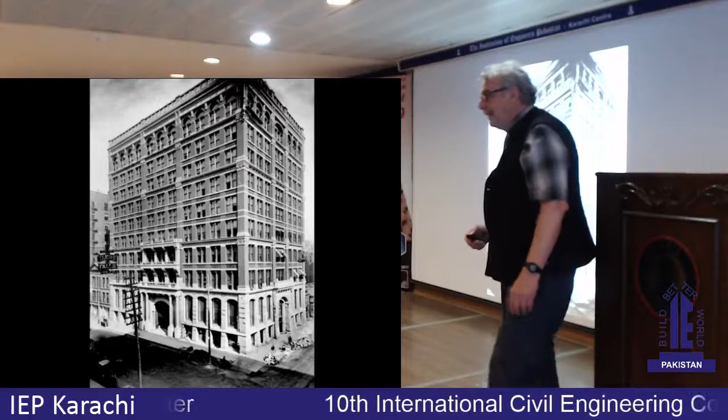But I'm switching the story now to the late 19th century in Chicago. What is considered the first skyscraper is this building here, only 10 stories high, but as what was then a mixture of iron and steel frame, but a completely coherent, effectively moment frame structure, but with the masonry around and infilling the walls. It was the first phase of tall buildings, and here this picture was taken only 3 days ago here in Karachi. These are 10-story buildings.

So, and we don't think anything of it. And as we drove by, I said, "Are you really serious about these buildings? They look like they all are vulnerable to soft story collapse." And everybody I've talked to, one of the colleagues here, says, yeah, they are. So I guess there's a bit of a problem.

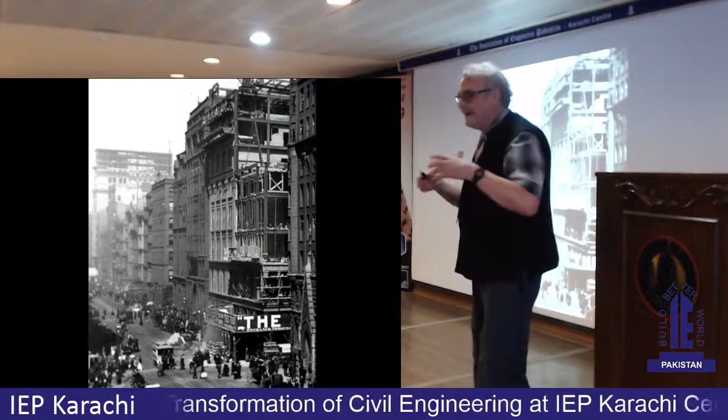But back to Chicago, this was a new world because buildings till then had masonry, solid wall structural systems. And it was a totally different experience to be an engineer in the days of Christopher Wren or even Michelangelo or Brunelleschi, who were working with masonry. It is a lost art to a large extent for all of us architects, and the engineering that comes with my architecture degree, but I'm not a structural engineer. But now I am very much embedded in the effort to do engineering of buildings, and that's what I'll be speaking to.

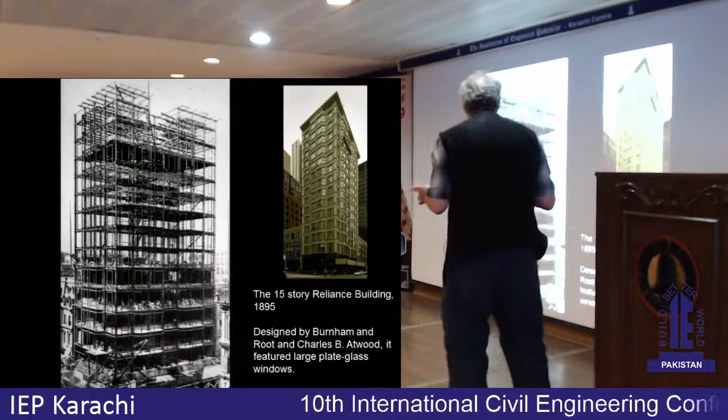But the switch to frames, hopefully it'll communicate. And as you see, what was remarkable is the complete steel frame. This is now the transition from iron to steel. One of the best iron frame buildings I found was in India, in Mumbai, what was then Bombay. But here, steel frame. And the Bessemer converter process brought steel into massive production, and it became the basis for doing structure. And you see the windows are ever so much larger than when it was a bearing wall building.

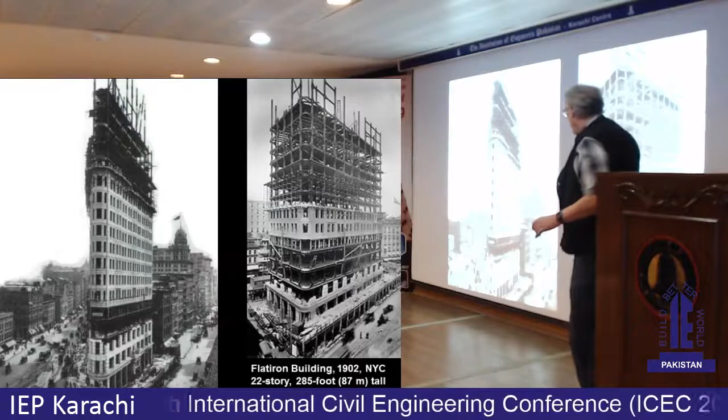And one very good example of this and the engineering of it is to look at the Flatiron Building in New York, because these pictures of it show that the putting of this heavy wall masonry on it is by starting the building of it upper as well as at the lower, to avoid it bearing on itself to become a bearing wall, because it's hanging off of the frame. So the wall is the same thickness from the basement to the roof. And that's a transition in the building construction. But remember, now we're talking about a huge amount of masonry, multiple leaves of masonry in a frame building. And so how do we do this?

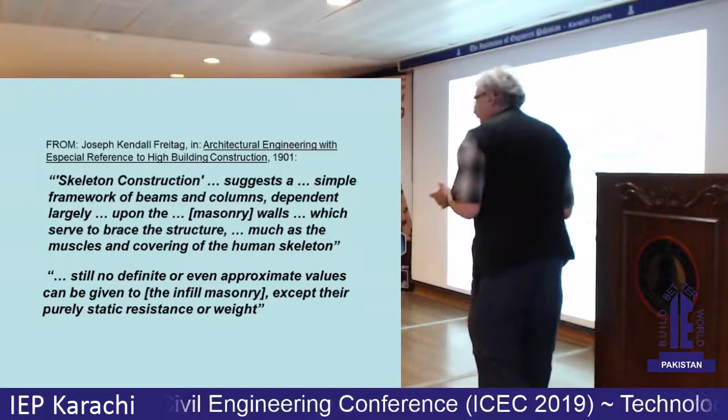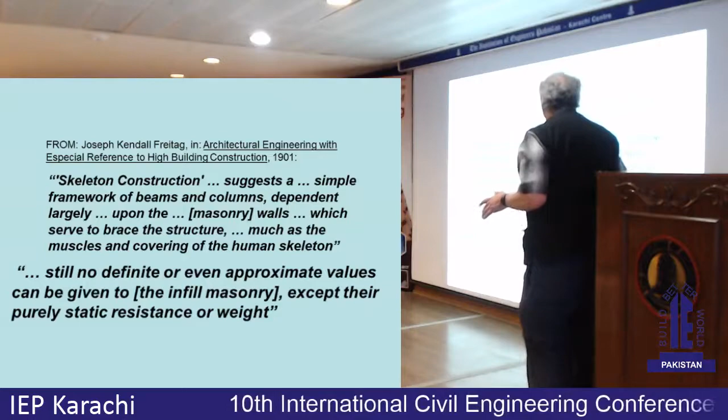And there is a textbook authored by a gentleman by the name of Joseph Kendall Freitag, structural engineer, who did a textbook on how to do tall buildings in that era. This was published in 1901 and again in 1905, a second edition. And he says, still no definite or even approximate values can be given to the infill masonry except their purely static resistance or weight. But notice that he's saying it's essential to the design. More or less like the rest of our body from the bones holding the body, the anthropomorphic analogy for the making of buildings in that period that are structural frames.

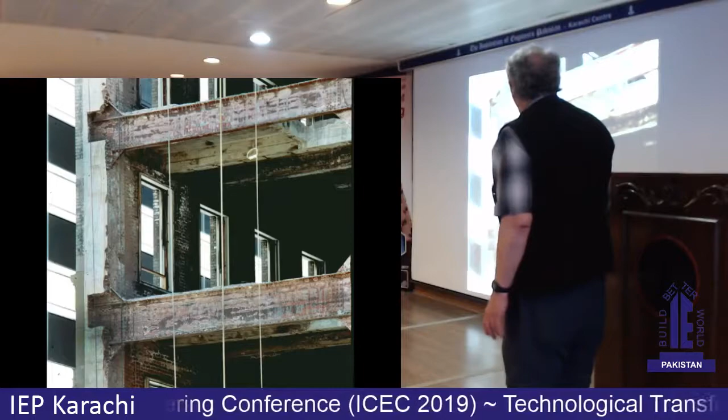And here's a good example constructed in San Francisco after the city burned down in 1906, which I'll get to in a moment, with this system. And you see how much masonry there is here. And that the steel frame is not a braced steel frame, but it has little, if anything, little haunches here. But imagine the weight of the building. So we're talking about a different kind of building than we're used to today, where the whole effort is to have as little masonry as possible and to have the frame designed and computed and mathematized with portal frame analysis. But you see how lightweight the frame is.

The last of this series of buildings is the Empire State Building, 100 stories. And it's heavy wall masonry. They even did some testing with some measurement instruments, and in a very heavy hurricane windstorm, they computed that not until they saw a crack in the masonry did they even come a load onto the steel frame.

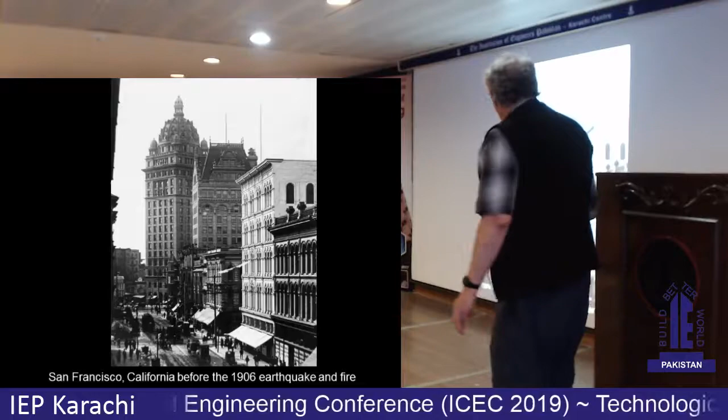So looking at San Francisco before the earthquake in 1906, it was already full of these buildings. It was the biggest city west of the Mississippi in North America, and economically the center of the whole left coast of the continent. And then the earthquake came.

The earthquake, of course, then initiated a fire which burned through the entire downtown of the city, burning out every single building, including all of the fireproof buildings that were steel framed with masonry infilling. All of the contents, just like with the World Trade Center after the attacks, burnt. But unlike the World Trade Center, the buildings remained standing. And you see the fire went everywhere.

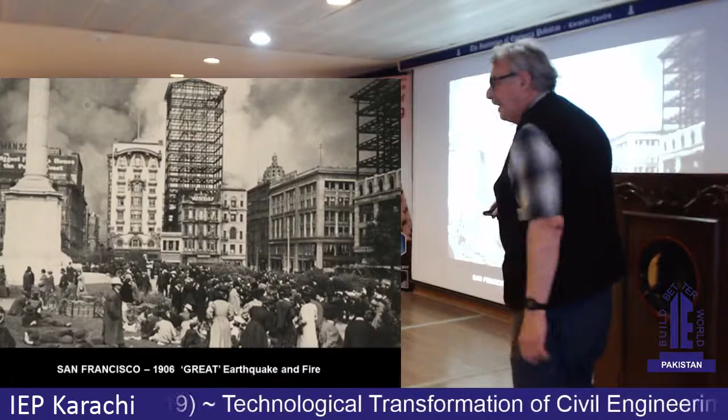The firefighting in those days was primitive at best, and the earthquake had already broken all of the water lines. So it was impossible. It was only when the winds changed to blow in from the west that the fire stopped. That's why we have Victorian wooden houses still in San Francisco today. But you see, this is after the earthquake, before the fire, and look at how the fire took the rest of the city. It is what took the city down.

But still standing here under construction are steel frame buildings, but there are many that were already finished and occupied. And believe it or not, 110 years later, those buildings are still there today. And not only that, they had to be thoroughly renovated because they all had fires burning through them.

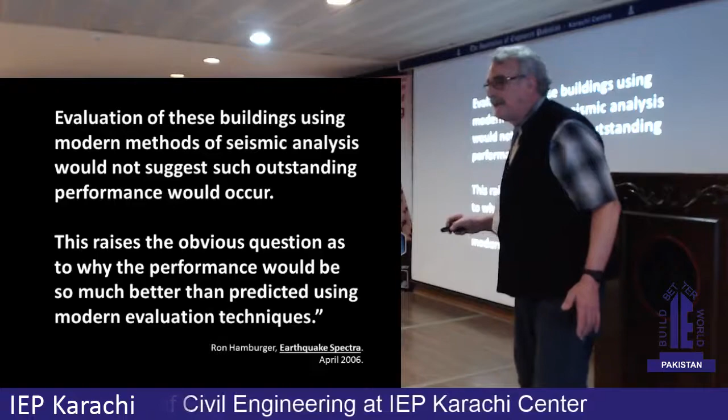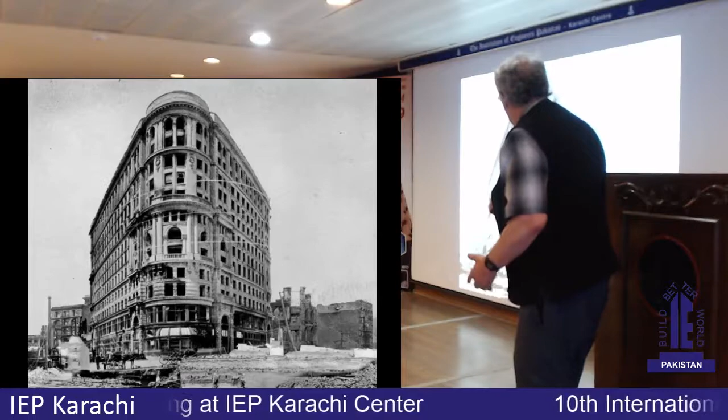And one of the top structural engineers in earthquake engineering in California said this in a paper on the 100th anniversary of that earthquake: if you evaluate these according to our current systems of evaluation, the masonry is not included as a lateral force resisting material. It's only dead weight, just as Mr. Freitag had anticipated before, but he had considered the masonry essential. Through the rest of our last century into the present, the masonry has not been included as part of the structural engineering, and that's what I want to get to later. But to see the effect of having the fire as well as the earthquake, why this is not functioning there, it's coming now.

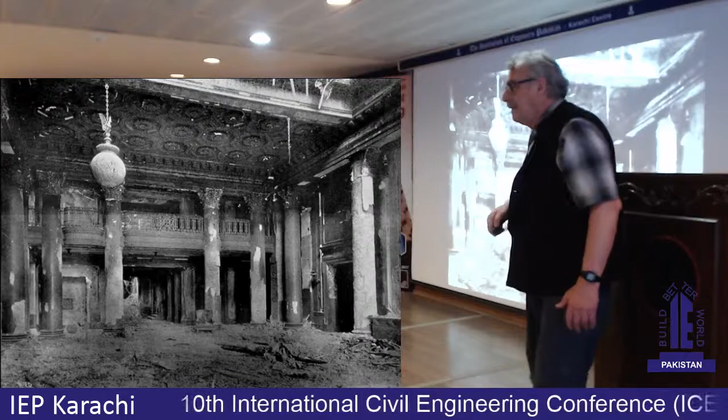The Flood Building is one very good example. This had an internal steel frame. As you can see, it's a heavy wall and architecturally very sophisticated masonry building. Again, the Fairmont Hotel, after the fire, is exactly the hotel that you can stay in today when you come to San Francisco. And here's the lobby after the fire, and then the lobby today. So I show this to show what we're dealing with, because that's the building as it is today.

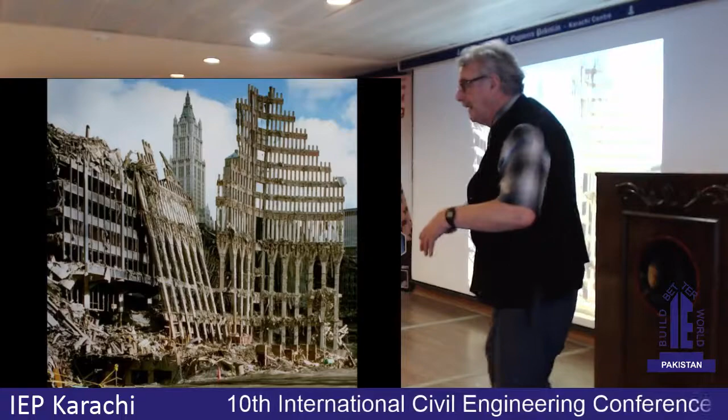I'm not going to speak so much of the World Trade Center here, but there's one building that was totally burnt out from the spray of the fire when the buildings collapsed from the burning of the fire, heating up the steel until the point where it failed. That building was called 90 West Street. It was built in 1908, designed by a famous American architect, Cass Gilbert. 23 stories made it, I think for a moment, the tallest building in the world. It was still there until the collapse of the towers. And today it's the only building still there that was burnt out from the collapse of the towers.

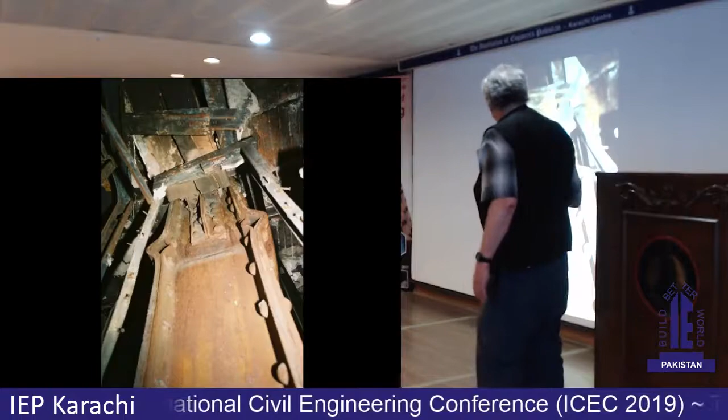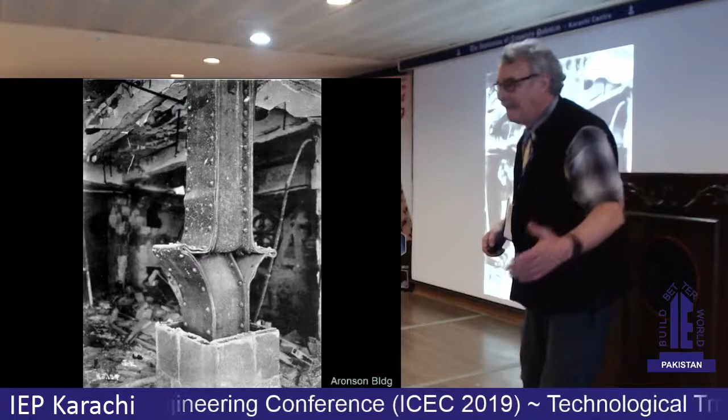And in fact, it was very interesting to see that the columns were beginning to compress from the expansion from the heat. And you then have to ask the question, well, why didn't this building collapse? It was most interesting to compare that to the 1906 fires in San Francisco; you see the same thing happen. So I finally figured out, from witnessing it live by going through that building, why these buildings didn't collapse. And why do you think they didn't collapse? When they were compressed, the columns are compressed like this. Why wasn't it a long column failure or something like that? Or why didn't this just continue to collapse?

The reason that I think of is that the masonry had kept all of the exterior bay of the frame cool because it was heavy masonry. That meant that with the fire burning inside, where all of the fireproofing had fallen off because of the earthquake, the pressure on the columns went up and up and up until it crushed the column. And then as the outside frames were cool, the building didn't collapse. And they came back and repaired the buildings. Those pictures are in buildings that are still there today. They replaced the columns.

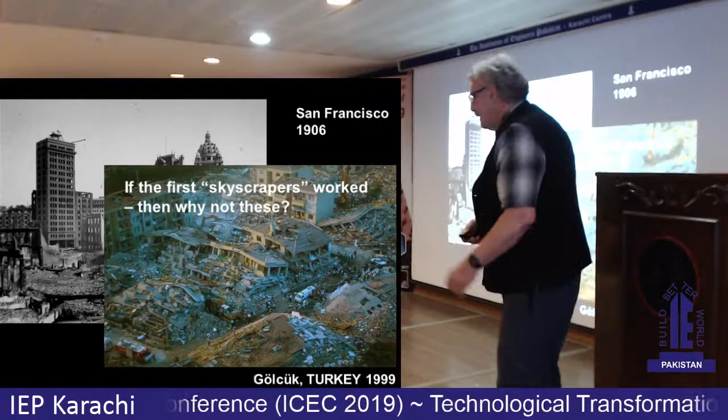So it's a remarkable essay in the resilience of a building system that was invented at that time. And then you have to ask, well, why do we have every single one of these buildings of frame construction, steel frame construction, remain standing in repairable condition after the worst earthquake in North America, outside of one that was in Alaska? And then these are falling down like tenpins in Turkey, in this one example, but in other places too.

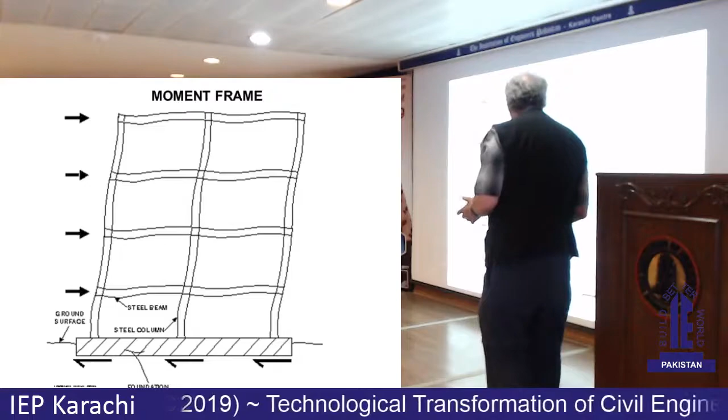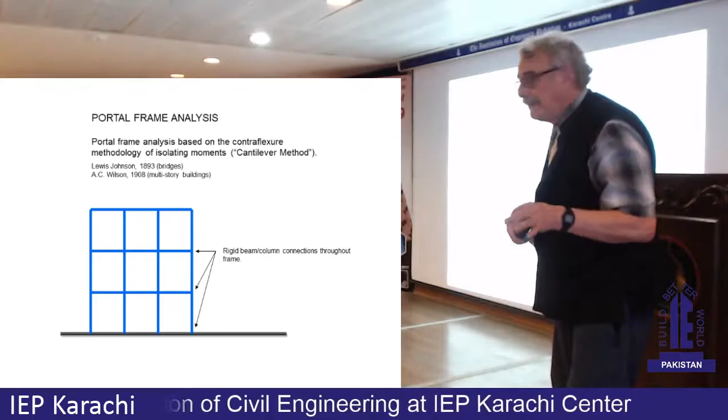But think of it for a minute when we have masonry in them, and I'll get to that, because there was a change in the mathematization, in the portal frame analysis from the time that the earliest of these buildings were built, from a pin connected, because of the problem of the indeterminate structural analysis where you don't have a methodology of simple three equations of equilibrium. So they changed this.

This just doesn't seem to be working. Is there? No, the receiver is right there. Right there, I'm pointing straight at it. It was working earlier.

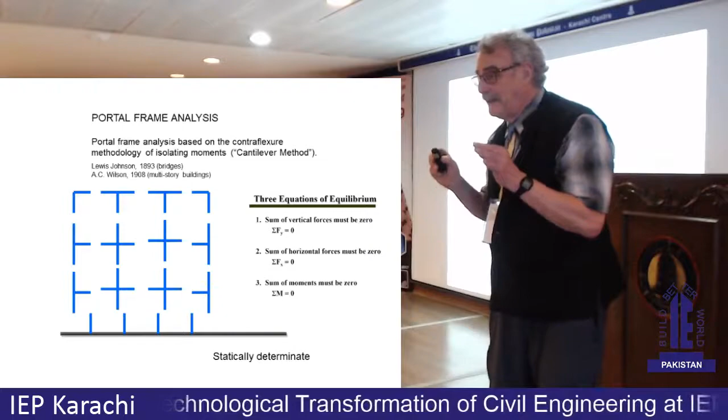And so the contraflexure method, but think of it for a moment. This then meant that you could do much more precise calculations. It reduced the overbuilding. Beams got smaller because now you had more precise calculations for their sizes. So that's just one thing. But remember, all along here,

I don't know what to do, but you have another one? It just is very slow.

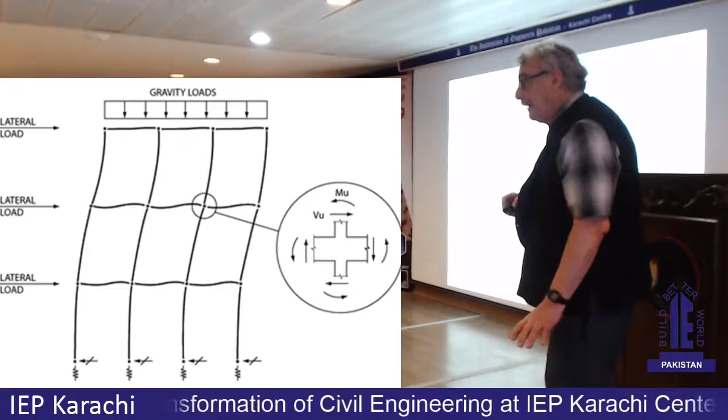In addition to that, the development of reinforced concrete as a frame system, in my estimation, is a material and system very much different than wide flange steel. And when you look at it, the whole idea is that the lateral resisting system that you're calculating is the beam-column intersection. Unless you build a shear wall building, it's no longer any more than that. And so we have this problem.

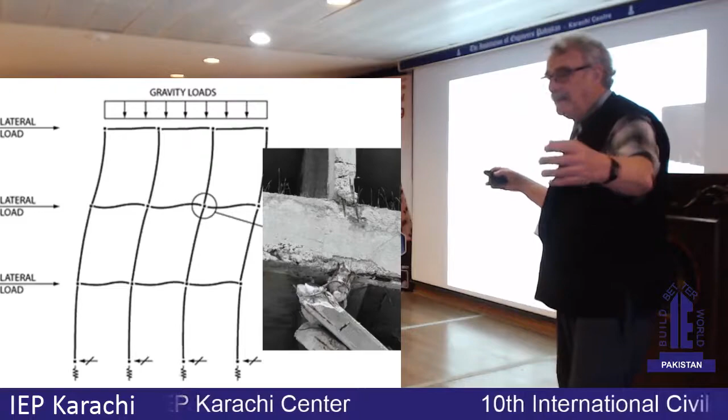And then I was talking with Edmund Booth in London, by email, and he says it's sometimes 5 to 11 times the shear forces in the beam-column section of the beam than anywhere in the rest of the beam. For concrete, the compressive resistance of concrete is often very much less than the tensile strength of the steel. And then when it gives way, there's nothing. Then it goes to collapse.

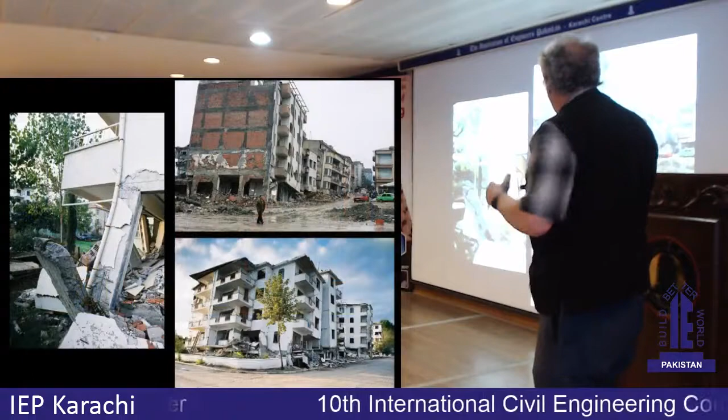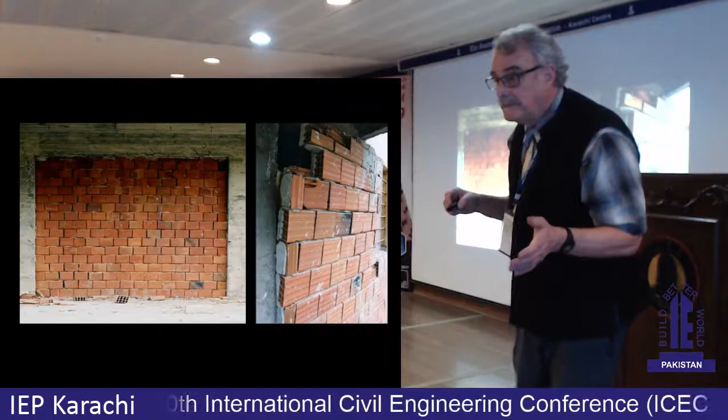And very often it's because of the masonry in the upper floors. The forces are greatest at the base, and if there are walls there, it takes them out, such that there's a collapse mechanism. So these infill walls, and remember I was talking about the masonry in the San Francisco earthquake, is infill as well as cladding. But here we have infill walls that are not part of the engineering, but they are part of the building.

And as we see, perhaps you could even say for 100 years the engineering calculations that we've been using for these buildings are incorrect to a very large extent. And even if you do a study of the diagonal strut effect of the masonry, if the masonry then collapses out of the frame, then all of a sudden you have no resistance in one area.

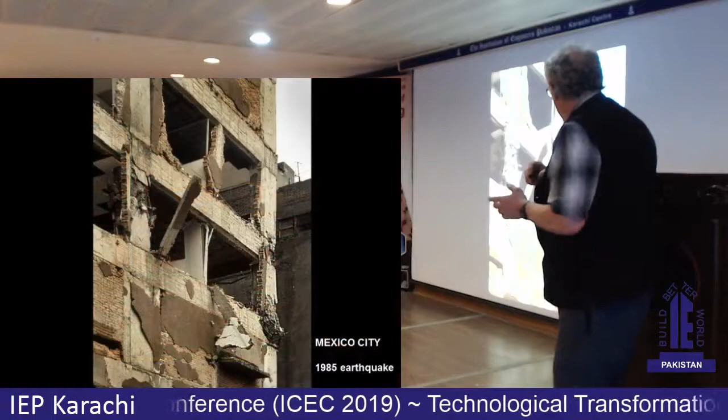And so you have the potential for catastrophic collapse, because the masonry infilling, as you see here, has jacked this column, and this building was minutes from collapse, because here is all the rebar wound up from part of this intersection, but for some reason it didn't go all the way down. Perhaps a little bit of resistance from interior walls; it remained standing. This is the 1985 earthquake in Mexico City. I'll give you a little bit, and unfortunately the picture is a bad copy.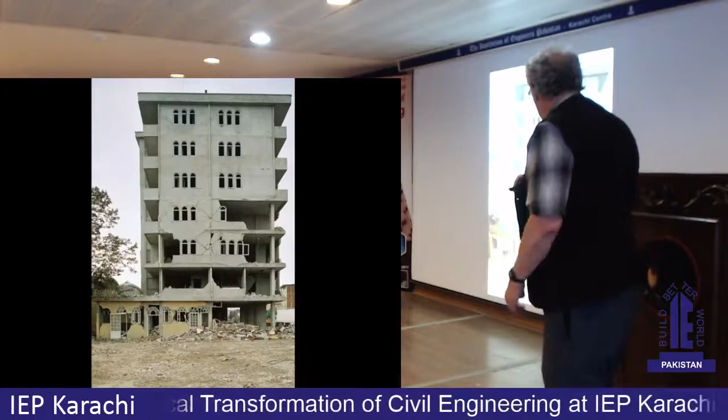But again, in Golcuk in Turkey, in the Izmit '99 earthquake, this kind of damage: the building had walls that went to the ground. But the lightweight infill now is insufficient. And so you have a collapse mechanism if it breaks up some of the walls near the base of the structure, and all of a sudden it's just like having a soft story.

But this one I want to show you in the Gujarat earthquake in 2001 in India. These buildings were meant to be identical. They finished this one and it was occupied. They then started building this one, and the earthquake came when it was at that point. Frame action could occur here. That's the basis on which all the calculations are produced, the frame action of a bare frame.

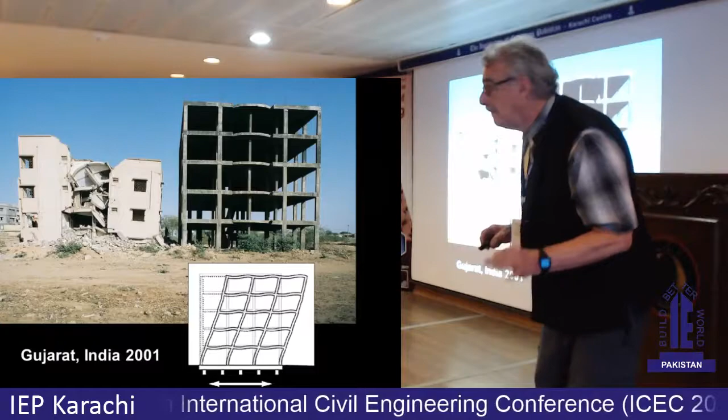But not anymore when you're living in it. Then the infill walls are there. They're not part of the calculation. They're not even enough over-designed to keep it from collapsing.

So I show this in Turkey. We photographed these after the '99 earthquake. This was under construction when the earthquake happened. And I'll never forget stopping to take a picture, and I thought that I was photographing a military site because this guy came out, climbed over a barbed wire fence, and came up and asked me what I'm doing. I was just simply photographing what turned out to be his building.

Well, I came back, of course, a number of times after that earthquake, and he had demolished a story at the top. Well, do the arithmetic on that one. He obviously had the picture published around the world, by not just me, but every engineer and architect who came by after the earthquake must have stopped and photographed it because it was right by the toll booth.

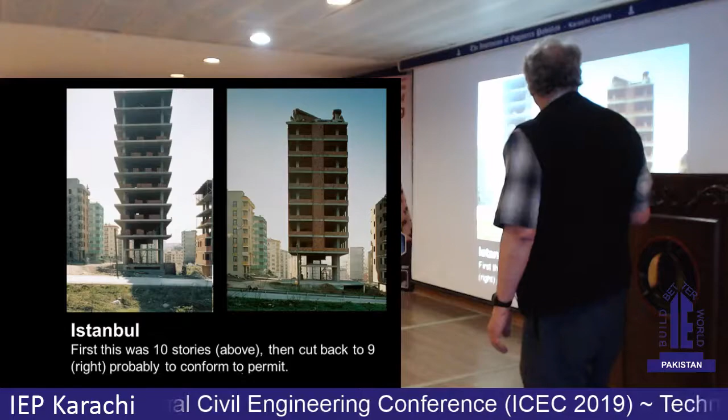And the building is still extant, but when you look at it down at the bottom, instead of knocking down extra floors, the thing they should have been busy building is a shear wall. You know, it looks like an accident just waiting for a moment to happen.

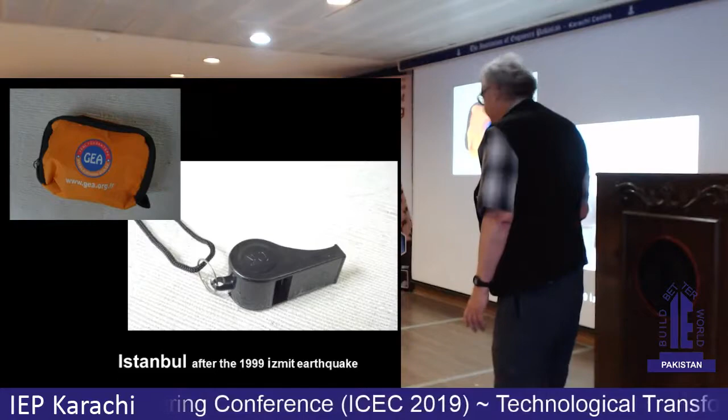Of course, they believe that Istanbul is next on the list for the earthquake on the Marmara Fault, the Anatolia Fault. But then when I came back later, all that they could give me for earthquake hazard mitigation was a whistle. This was handed out. This is if I get stuck in a collapsing building and have the presence of mind not to crawl under the couch, but lay down next to it, I might be able to be heard by the rescue.

A whistle. The World Bank said there are too many buildings that need a seismic upgrade for them possibly to be able to provide the funding for it. So the only ones they were able to fund were hospitals and fire stations.

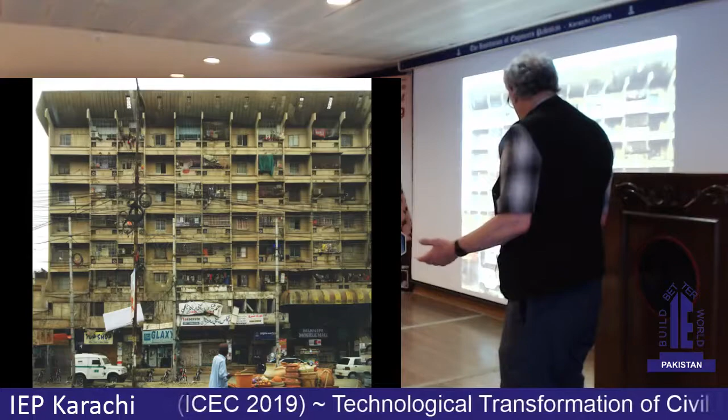Well, I rest my case now here in Karachi. This was taken only 3 days ago out of the window of the car when we were going to the previous earthquake conference. And that's the kind of concrete building that we're dealing with, in many, many countries; it doesn't matter where you are. And the US would have these buildings too, except we build most of our buildings that people live in out of timber.

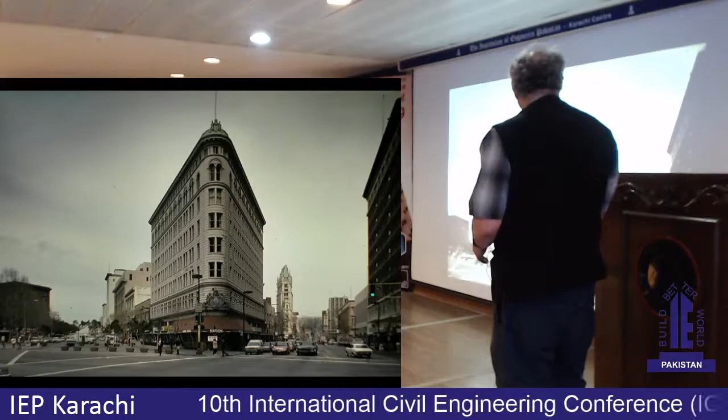And so I'm going to show the '89 earthquake, which in some ways has some recognition or memory from the previous earthquake. But what's interesting is the kinds of buildings that I'm talking about from the 1906 earthquake exist in Oakland, California, in the '89 earthquake. And it was amazing how much of a fight we had in order to keep buildings of this quality from being torn down because of the level of damage.

And that level of damage was considered a loss of strength, even though that's good performance as far as a building is concerned, because the masonry is the stiffest element. It means that the frame underneath has not changed in any way. And so in a lot of these buildings, they've stripped off the entire interior withe or leaf of masonry and put in reinforced concrete gunite to strengthen them.

And one interesting example is the Hotel Oakland, which was turned into senior housing. And they had ripped out all of the interior masonry walls that were infill walls when they did this as a seismic retrofit.

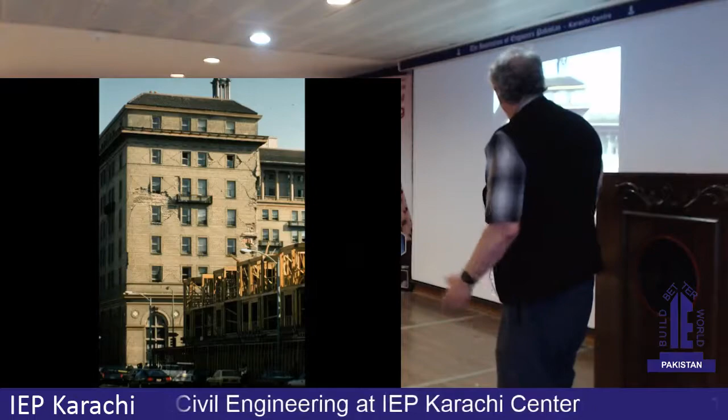They added a shear wall that was too narrow. It moved in flexure. And look at all of the exterior masonry damage. It was the only building that had that much exterior masonry damage, and yet it was the only one that had been retrofitted. Wait a minute.

What's going on here? It is the result of taking out all of the interior infill walls, which were thin walls of brick, but nonetheless they contribute to the stiffness and the resilience of the building. This replaced, as I show here, that entire wall. Another example of a building of the earlier era with masonry exterior, they felt they needed to put in shear walls. It ended up looking like that.

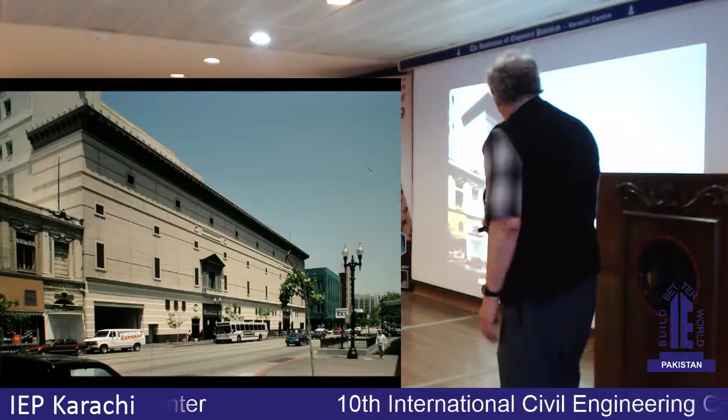The most expensive retrofit, probably 4 times the cost of actually replacing the building, was to do base isolation on the 1920s era City Hall, which was a steel frame building that you see here that had simply developed some cracks in its masonry interior and exterior finishes. And you can then see the steel frame. And here they then put base isolation.

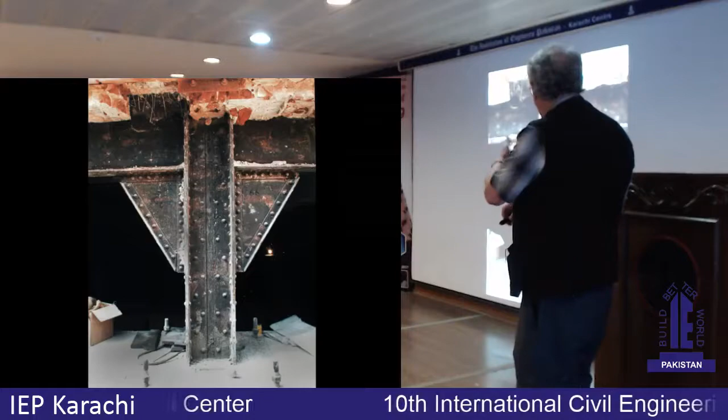And you see it exposes what was actually a very robust riveted steel frame in the building that is then completely jacketed and surrounded by the masonry, and that's where one of the base isolators is going.

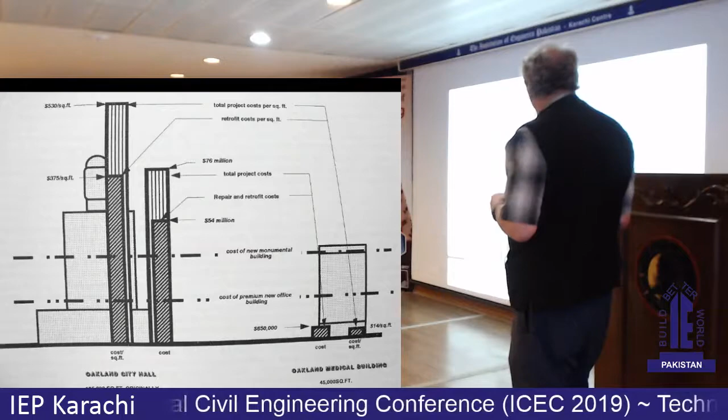Well, you know, I, together with an engineer as a consultant, were hired by the owners of this building because they needed a repair that would be approved by the city. And what was interesting is I found an engineer in Los Angeles who was willing to, and had a method of analyzing the strength of the building, including the resistance of the masonry. And at the end of the day, we did the retrofit for this much cost compared to the retrofit of the city hall at that much cost by comparison.

It's the only one that was done like this because it didn't get shut down as many of the other buildings did, because the cracks appeared in what appeared to everybody who studied it a back wing, but in fact it was structurally part of the building. I have a proposal, and those of you who saw my lecture in the other conference will understand where I'm coming from with the traditional construction of Kashmir in India and Pakistan. But looking at that combination in Turkey, this is called himis, and in Pakistan it's called dajji dewari.

But here is a perfect example of this problem of the performance of reinforced concrete. And it doesn't mean that reinforced concrete can't be earthquake resistant. I want to make sure I leave you not saying that all of your work in concrete is defective. But most of the buildings built are not even engineered. They're often built just following a rule book and a contractor putting them up.

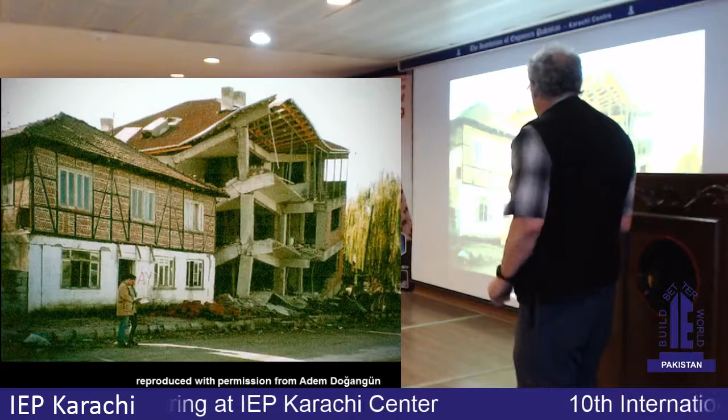But nevertheless, what you can see here is the performance of the himis building on top of what was a bearing wall masonry base is so resilient. It's not strong. We're talking about a resilience of weak structural systems. But how can we get some of that performance into reinforced concrete is the question I asked after I have now studied this traditional system.

Here is an example in Indian Kashmir in Srinagar of a multi-story building. And you see it's 4 stories high of dajji dewari construction. So this kind of construction, which is only 1 brick thick, we're talking about thin-walled frame structures. But why is this different performing than concrete buildings that have rebar and all of that with infill walls?

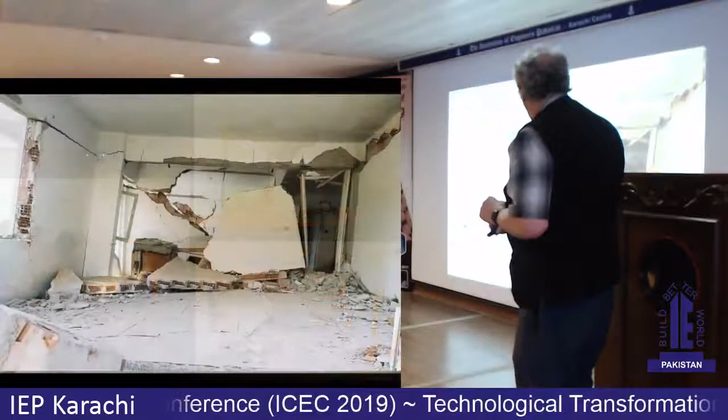So if you look at, for example, the collapsed infill walls of one of these concrete buildings in Turkey and compare it to a building right next door of the himis style, you realize, wait a minute, this wall worked, using the engineering meaning of the term worked. So the plaster having fallen off means that it's working back and forth without a collapse of its infill panels.

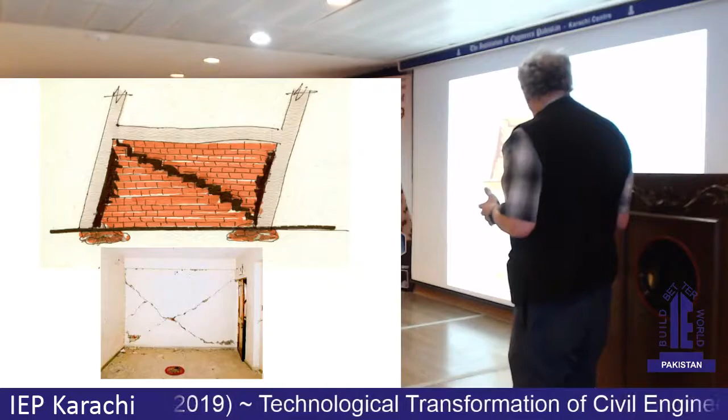The masonry is working together with the timber frame in a way which, if you see the walls in the concrete buildings, they just develop diagonal tension cracks, which in Italy and Portugal are called crosses of San Andrea, the saint who was crucified on an X cross. The idea I have is to have what's called a subframe.

So I call this armature cross walls because these are not to be confused with shear walls. And the reason is that a shear wall is designed to be like a deep beam and have a foundation and have flanges and all of that in order to meet any kind of code that's been developed for them.

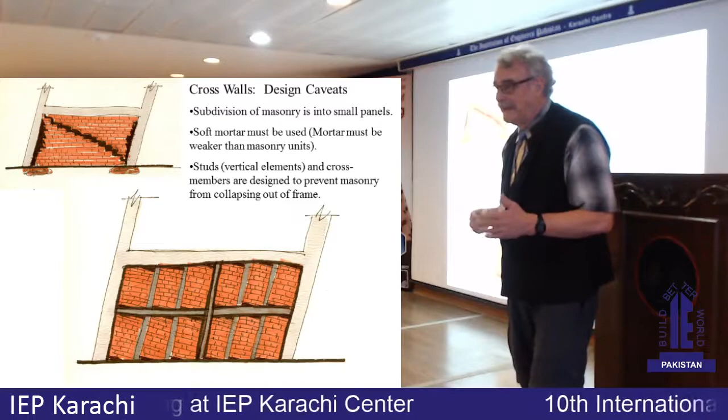But a cross wall is a term of art that came from the building code they developed for existing buildings, the Uniform Code for Building Conservation, UCBC, and they call cross walls just the interior walls of a brick building that is being retrofitted. You can take a minimum factor for them to compute into your calculations for earthquake resistance.

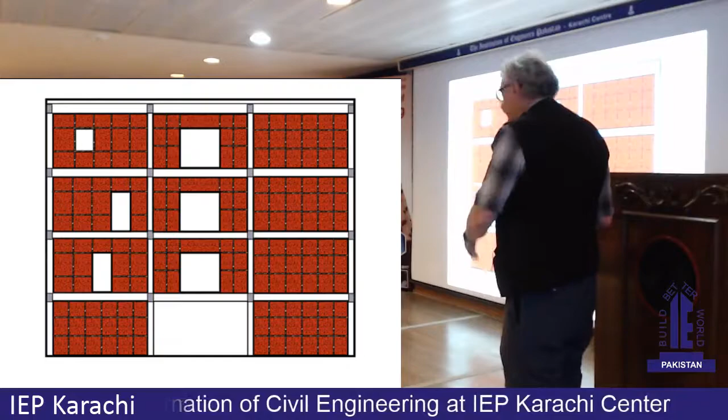But by having a subframe, which in a multi-story building could look like this, there are even ways that I imagine that one can introduce this kind of framework into an already extant wall without having to demolish the wall, which means the building can be improved and retrofitted without essentially replacing it.

And this particular power plant that has a system of lightweight steel and is essentially otherwise a masonry bearing wall structure that's held together was right across the street from a reinforced concrete frame building that was under construction at the time that the earthquake collapsed it, even though it hadn't been fully infilled yet.

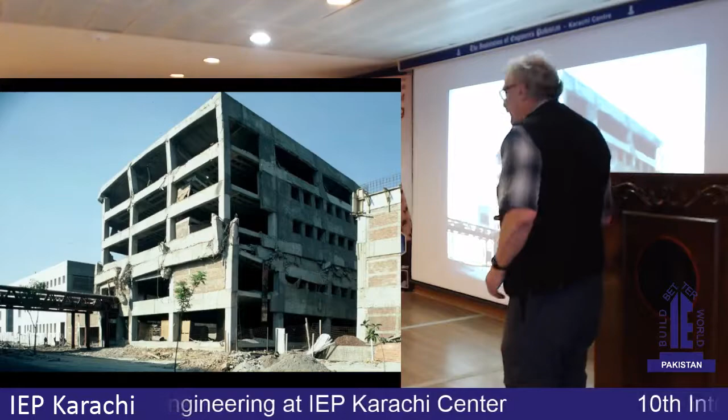So then we go to El Salvador and the earlier San Salvador earthquake of 1987. And I looked at this building and I thought, well, I could see that it had a soft story collapse, and finding the cause of that was not interesting. It's why the other stories didn't collapse too when you drop the whole thing from the height of 12 to 15 feet, bang, on the ground. That's even worse than the initial seismic event. Why did the building remain standing?

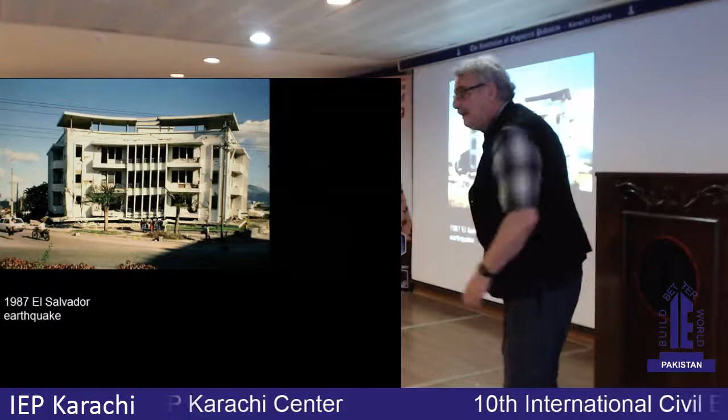And I got upstairs, I climbed in through a window, came upstairs and saw that there was a subdivision of the infill walls. The infill walls could remain in place. And then in addition to that, I think that the walls were thicker as well, and they were solid bricks, unlike the tuğla blocks that you find in Turkish construction.

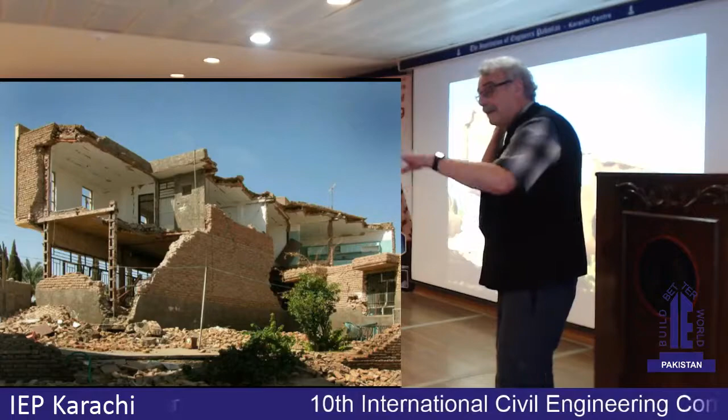Iran, most of the building construction there is lightweight steel, interestingly enough. You'd think we got better performance from that. Well, it didn't turn out to be the case. In the Bam earthquake, the steel buildings, almost all of them in the center of the city collapsed. I think they forgot to teach the builders how to weld, because it was almost all from welding failures.

But I looked at this and I thought, you know, what's going on here? Why is that there? Then I saw this in a building that was under construction, and I saw that again in a building where they hadn't finished the outside wall. And that is the front of a building where the back didn't have windows, and the back fell out, but the front remained standing.

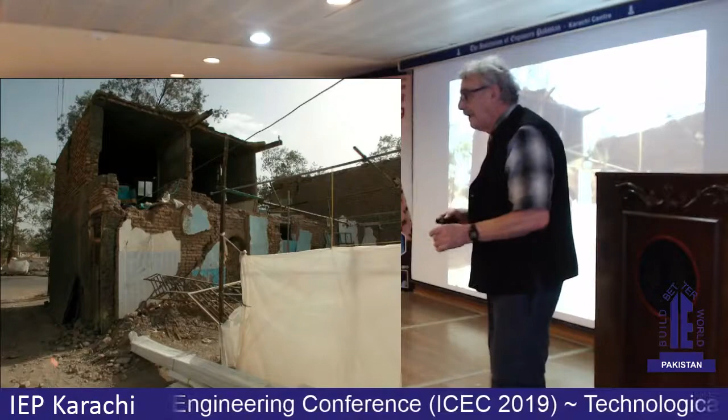I thought, here's a good example of a subdivision of masonry with very lightweight steel, almost like storefront rolling door steel, which is accessible in almost every place. And it made the masonry preserve the building from collapse. The masonry did the lateral resistance.

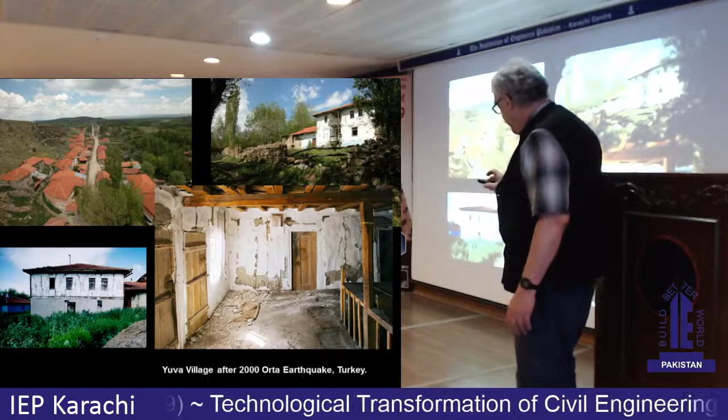And I show this because the inspectors, many of whom I don't think were really trained engineers, who went around after a smaller earthquake that was a year after the big earthquake in Istanbul, in Marmara and Izmit, told the occupants in these buildings that suffered damage in the Orta earthquake that these buildings are essentially ruined. We'll give you new buildings, and we'll take you away from what might be a landslide area, it could landslide in the future.

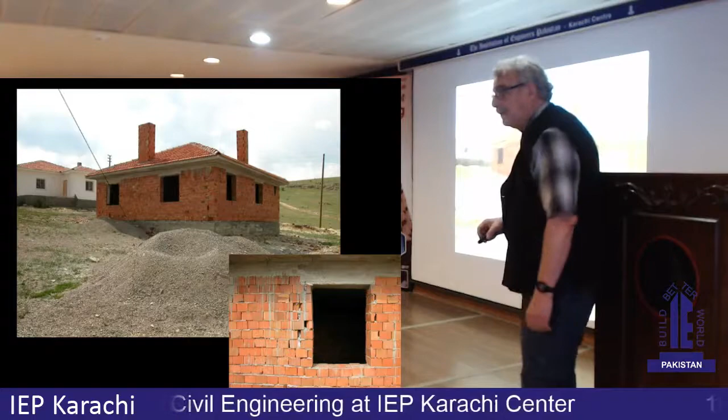And they built a whole new village here, and the old village is right there. And then I went to look at the new village, and first of all, they didn't have any barns for the animals, they didn't have any mosques, they didn't have any store. But wait a minute, one of the buildings hadn't been stuccoed yet. So the new buildings are unreinforced hollow clay tile with a solid, stiff concrete roof, and that's supposed to be better? I'm sorry.

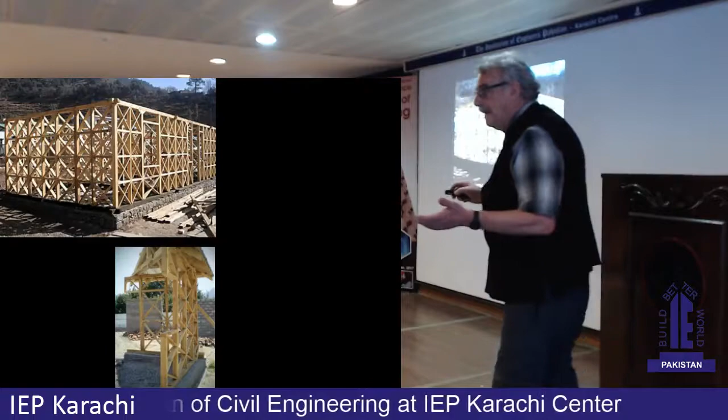The beauty is those old buildings actually were in a resilient style that I'm now proposing, and I'm looking for people and partners to really research the idea of the armature cross walls. I'm taught its effectiveness by those buildings that had that system. And I just want to leave you with one thing, in improving the Dhajji style after the Kashmir earthquake. The system that is essentially demonstrated and approved has these diagonals in them.

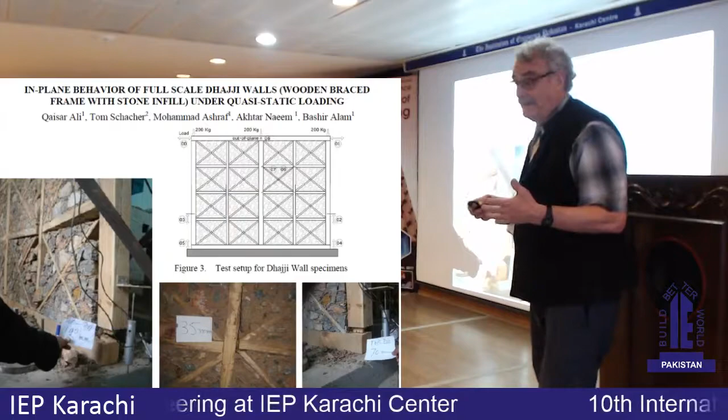And the traditional system has timbers that are diagonal, but they don't brace. They don't become braces. And they're small and thin and casually put together here, and the masonry is what's going to carry some of the load. But I have a feeling that some of this came in because there's a conventional wisdom within the engineering community that you need that in order to make sure it's braced.

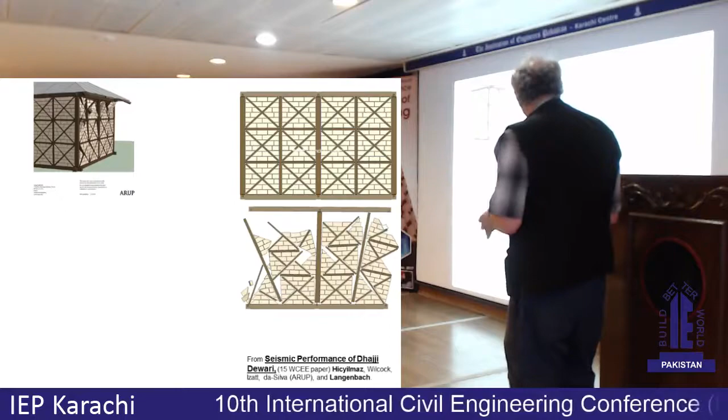And so almost all of the studies have been done here in Peshawar on their shake table or push test. You see, the first thing that happens is it comes apart at the corners. And then there was an engineer at Arup in London of Turkish extraction, his parents were Turkish, Kubilay Hicyilmaz, who did a very sophisticated finite element analysis of what he considered to be the example of Dhajji-style construction. And every time he ran the model on this Cray computer, it took a week to run it, the video that would come out would show the building just simply bursting and falling apart.

And I was consulting with him essentially, in a kind of partnership. And I said, take the diagonals out. Well, he said, I can't take the diagonals out. It would require a whole other $100,000 or euro or pound cost to do it. But he shortened them, and you see the effect of making them shorter, shorter, shorter. Finally, when he made them the shortest he could make them, you got a hysteresis loop that is effective.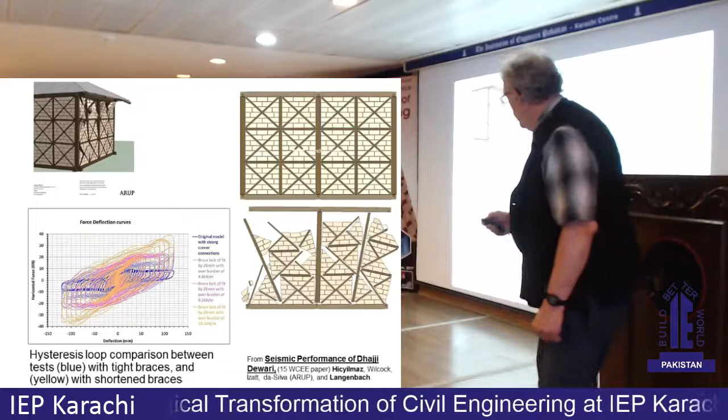That shows a level of energy dissipation that I have always ascribed to this system from empirical analysis of my own examination and studying it over time. And the effect of it can be seen, because the effect before was to burst the frame. And so it then was able to rock back and forth.

Can you give him a bump? He's totally asleep. Yeah.

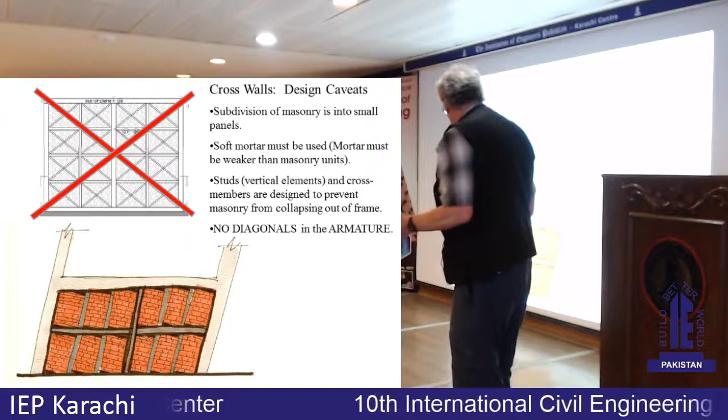I'd say when you work on this system, leave out diagonals, because if you look at the system in Srinagar, Kashmir, they have only diagonals from erecting the building, but most of the panels are rectangular. And of course, the masonry gets so much better if you do that, because you can put in the blocks, so you don't have to cut them and make them fit into a triangular space.

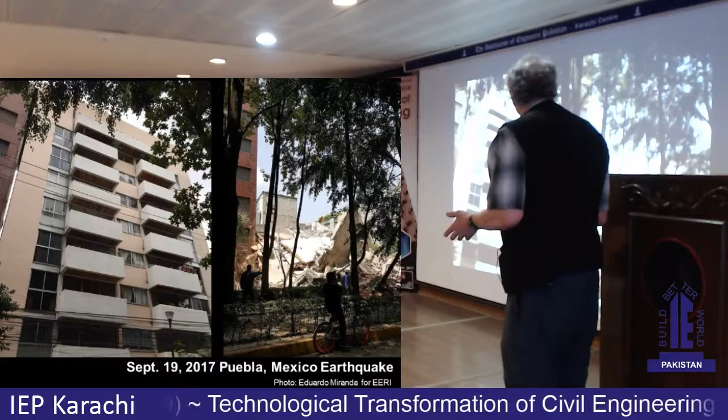But this whole question of diagonals was brought to my attention just a year and a half ago in the earthquake that most recently happened in Mexico City on the same date in the year as the one that happened in 1985, which embarrassingly enough is my birthday. But the one building that I got involved with, through one of the apartments owned by somebody we knew, I discovered that, in fact, they had put in diagonals. I think they had put them in after the 1985 earthquake, as they had in a number of other buildings.

And you see the damage around the infill panel that was even damaging the essential concrete frame of the building. And this is the building here. Whereas the inside walls were framed with orthogonal panel subdivisions of the infill, where, as you see, the kind of rupturing is more towards the center of the panel. It's not disturbing the structural frame of the building.

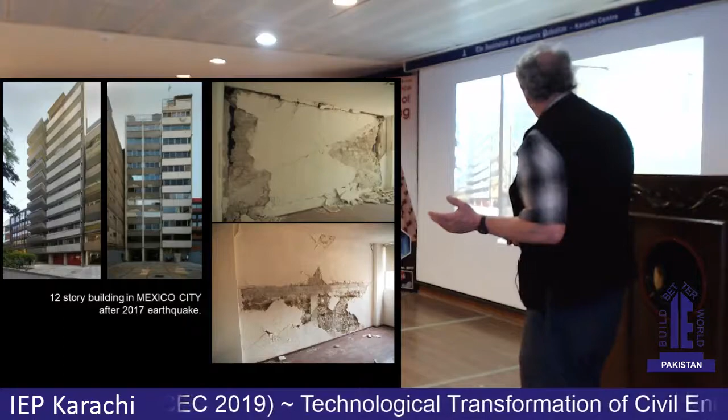Well, what's interesting is this building may be torn down and replaced. Had they not done this, the building wouldn't have been damaged so much. So there was a kind of a default to brace this in a very stiff way. And what I found very interesting, that I only just recently discovered in my research, after the 1906 earthquake, all of the engineers at that period really studied this earthquake in great detail.

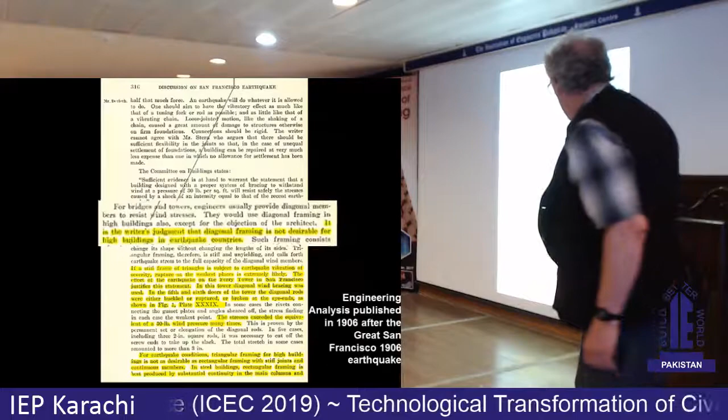And one of the analysis documents said, It is the writer's judgment, the diagonal framing is not desirable. This is after the 1906 earthquake. They're saying avoid diagonal framing. This is now 110 years ago. For frame construction, they're saying that in their judgment, it's not desirable for high buildings. If the stiff frame of triangles is subject to earthquake vibration of severity, rupture at the weakest places is extremely likely.

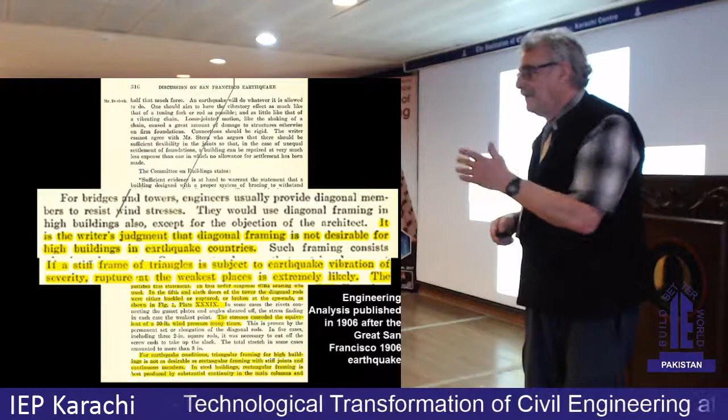Very interesting to find that back then, when in fact that problem continues to this day. And there's a tendency to look at a frame and say, wouldn't it be better if it were like a truss? It's counterintuitive, I think, to think that it would be worse.

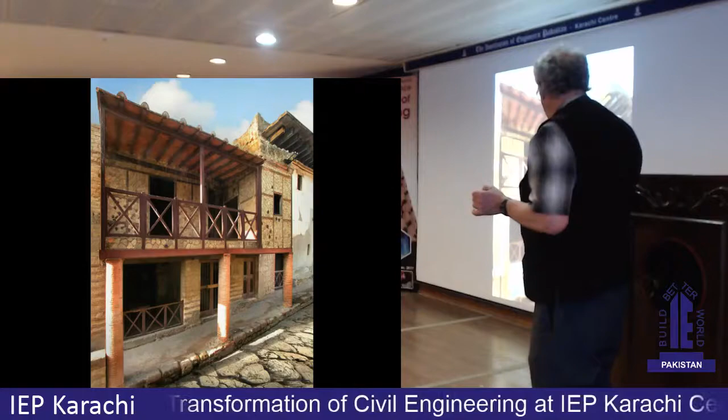And yet, I want to leave you with this concept, and it's a style of construction that dates all the way back to ancient Rome. And notice that in ancient Rome, the only diagonals you see here are on the fence, but the actual subdivision of the wall for what was their version of dhajji or half-timber construction is square panels or rectangular panels.

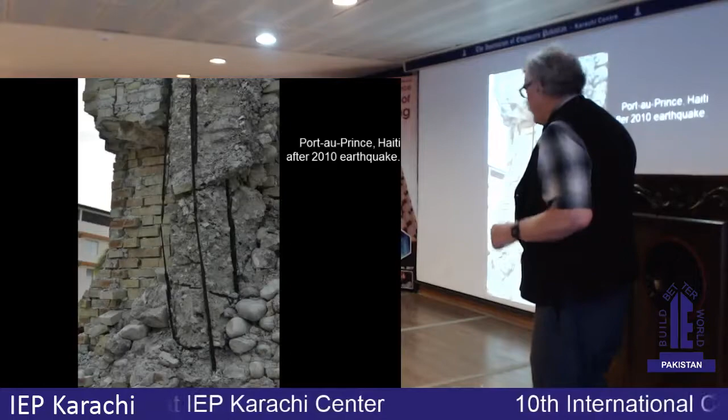And the National Cathedral collapsed. Both of these were concrete buildings, and that was the status of the rebar I found in many of the buildings, rusting away. They're 100 years old. The National Palace, in fact, was built by the U.S. Navy, so you'd think that it would be good construction. Well, but a 100-year-old concrete building is reaching the end of its useful life.

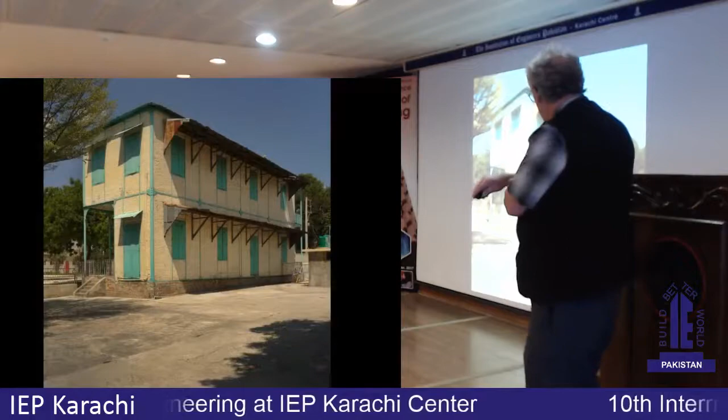And here's a brick masonry building in the churchyard of the same kind of construction. And the steel members were brought over from France. Same kind of construction as the church you see here. It never failed to have a Sunday church service. It's not been repaired. It's exactly as it was after the earthquake.

And so you have to say, wait a minute, maybe this is a view not into the past only, but into the future. If you look at it on the outside here, it's almost like what you now have as reinforced concrete, but putting the steel on the outside, tying it together as a framework where you can see it, maintain it, repaint it. It's exactly as it was. It's 110 years old, built I think in 1890, 1900. And perhaps that's a view into the future for a different form of reinforced concrete. A reinforced concrete that could last.

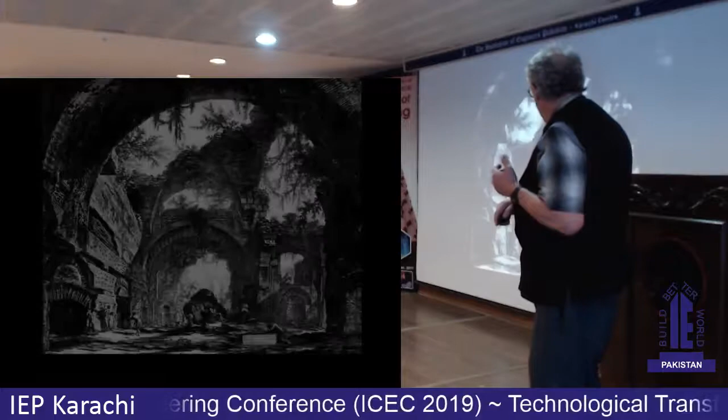And I then wanted to just leave you with a picture that some of you saw when you watched my movie in the previous conference. Because when you look at this, I came to the same view that Piranesi did a quarter of a millennium ago in his drawing, his engraving. I photographed it and constructed my photographs into the same view.

You're looking at unreinforced concrete of that roof, having sat there for 2,000 years, unmaintained for 1,800 of those 2,000 years, and then over the last quarter of a millennium, not changing that much in dimension between the two documents, as a demonstration of what is a remarkable material. Thank you very much.